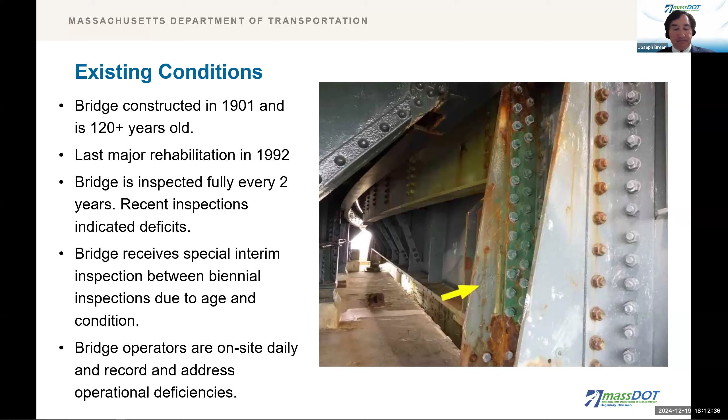The goals of the project are to reconstruct the bridge to ensure a 75-year design life or greater. We want to minimize disruptions to bridge users during construction. We want to eliminate functional deficiencies such as a long opening time, which causes delays for vehicular, pedestrian, and bicycle traffic. The minimal underbridge clearance requires the bridge to open for most vessels. The narrow channel and the center pier location prevent larger vessels from entering the upper harbor, and the center pier increases the potential for vessel impacts. We also want to improve the bicycle and pedestrian accommodation on the bridge to allow for future corridor reconstruction.

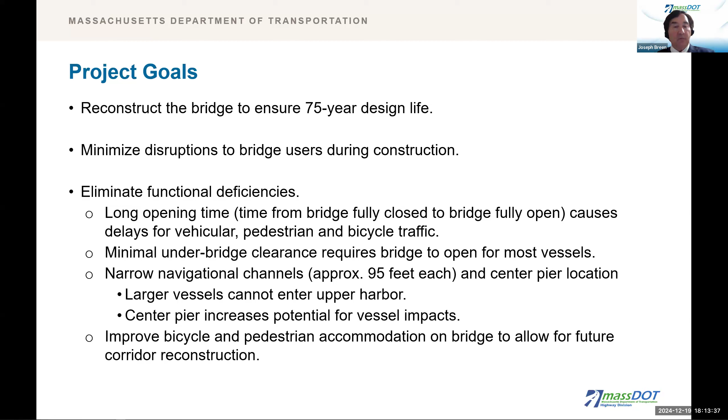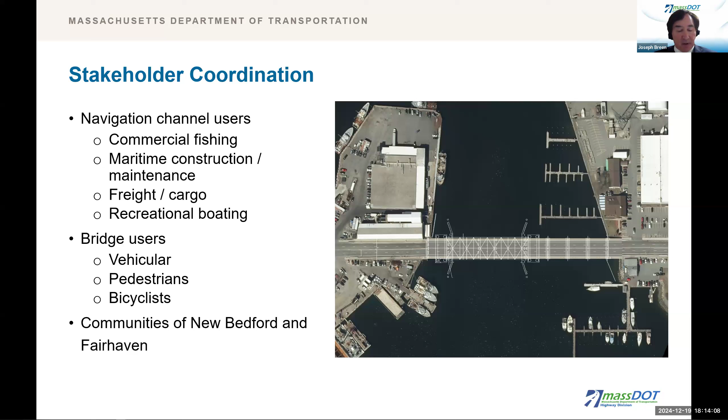Stakeholder coordination has been conducted with the navigation channel users, consisting of commercial fishing, maritime construction and maintenance, freight and cargo, and recreational boating, as well as the bridge users consisting of vehicular, pedestrians, and bicyclists, as well as the communities of New Bedford and Fairhaven. We've also continued stakeholder coordination with environmental and historic preservation agencies, emergency services and local government, the United States Coast Guard, and U.S. Army Corps of Engineers, Federal Highway, and lastly, Mass DOT.

The following map shows the project limits inside the red rectangle at the bottom of the map. On the left side of the map, we have New Bedford, and on the right-hand side, Fairhaven, with Route 195 at the top, Route 18 on the left-hand side, and Route 6 between the communities of New Bedford and Fairhaven, with Fish Island on the left and Pope's Island on the right.

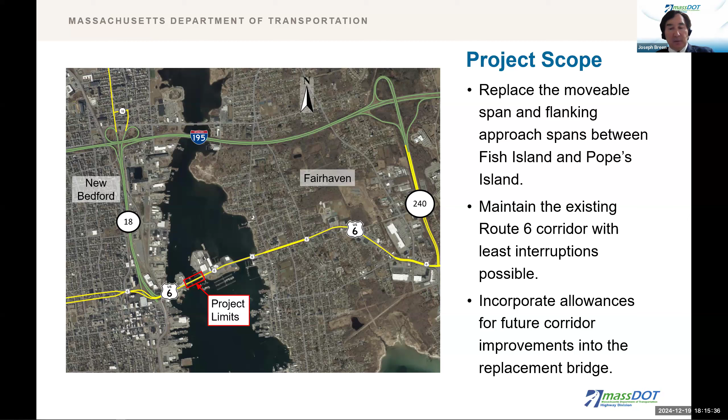And the project scope is to replace the movable span and flanking approach spans between Fish and Pope's Island. We want to maintain the existing Route 6 corridor with as few interruptions as possible and incorporate allowances for future corridor improvements into the replacement bridge. The next slide shows the project limits up closer between Fish and Pope's Island in the red rectangle.

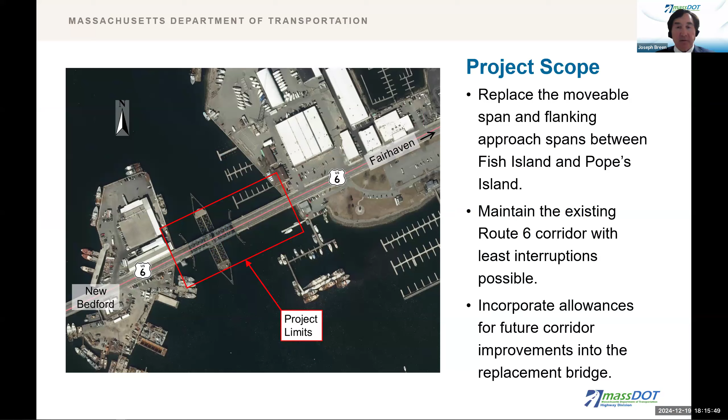So what is the selected alternative? The selected bridge type is a vertical lift span, which will allow a navigational channel width of 260 feet, a navigational vertical opening of 138 feet with 135 feet plus a 3-foot additional height for predicted sea level rise. The navigational vertical opening in the closed position will be 6 feet from the mean high water mark. And the proposed intermediate vertical opening will be 80 feet.

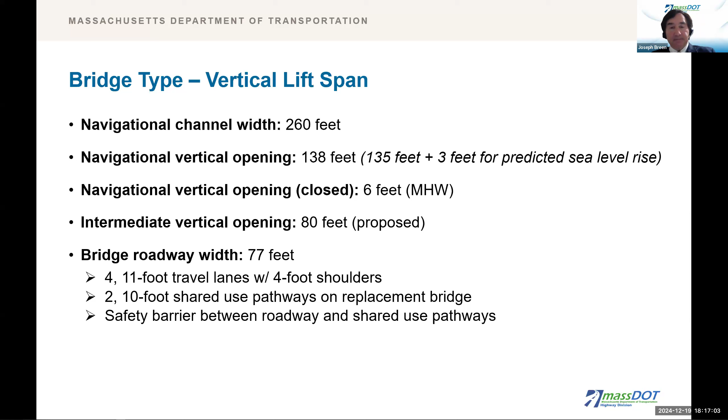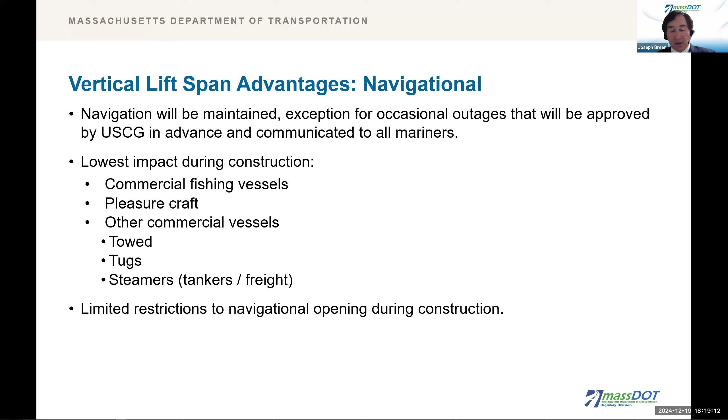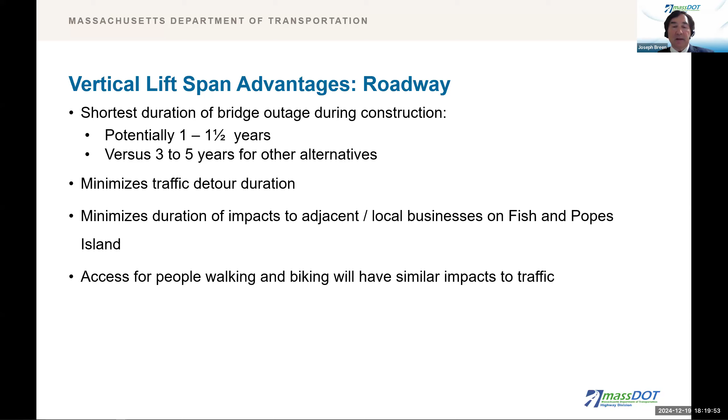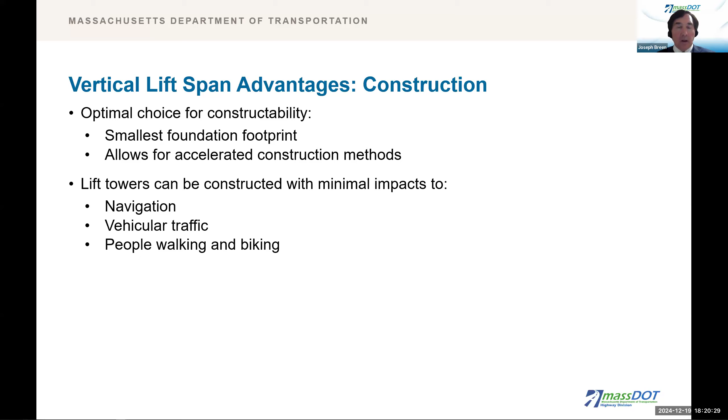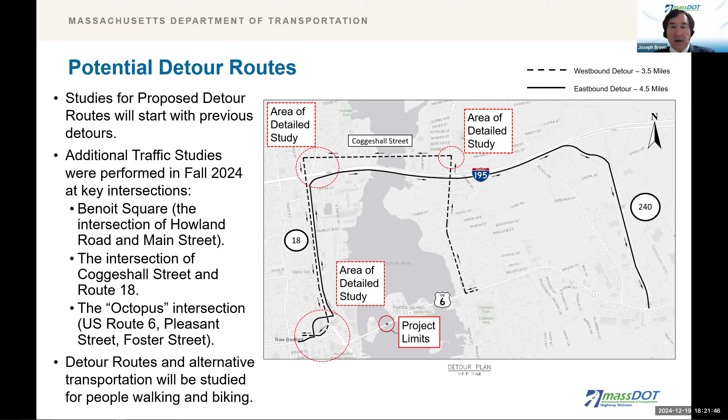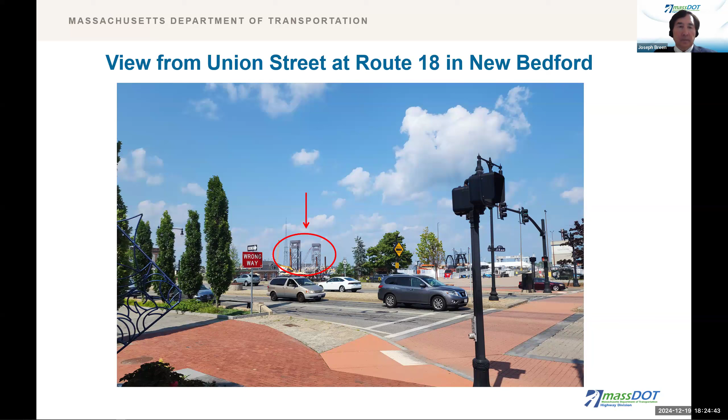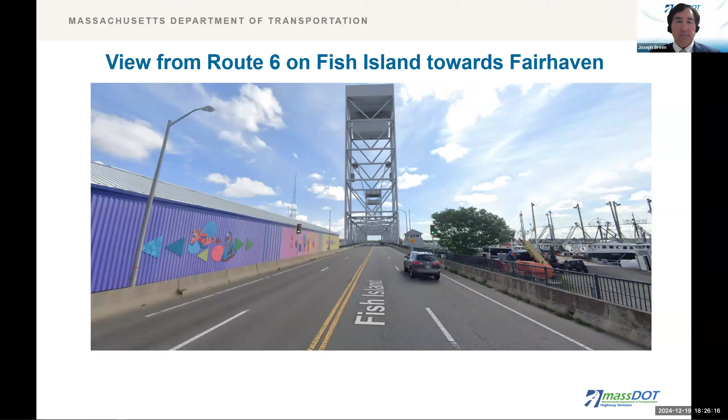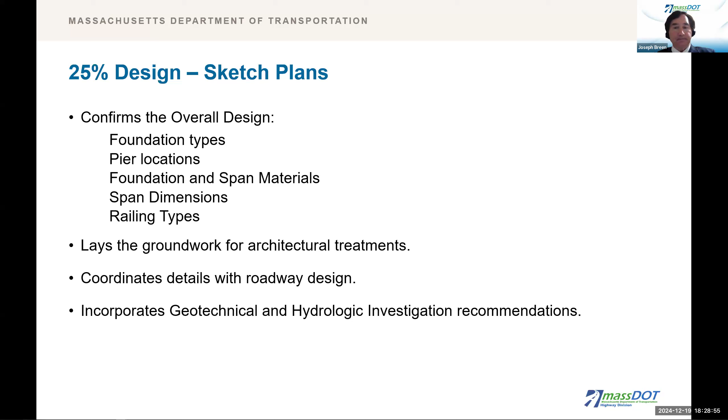The 25% design sketch plans. So what are sketch plans? They confirm the overall design for the foundation types, pier locations, foundation and span materials, span dimensions, and railing types. They lay the groundwork for architectural treatments, they coordinate details with the roadway design, and they incorporate geotechnical and hydrologic investigation recommendations. The team will also be in continued engagement with the United States Coast Guard Coordination, Mariner Outreach, New Bedford Port Authority, the City of New Bedford and Town of Fairhaven, and state representatives.

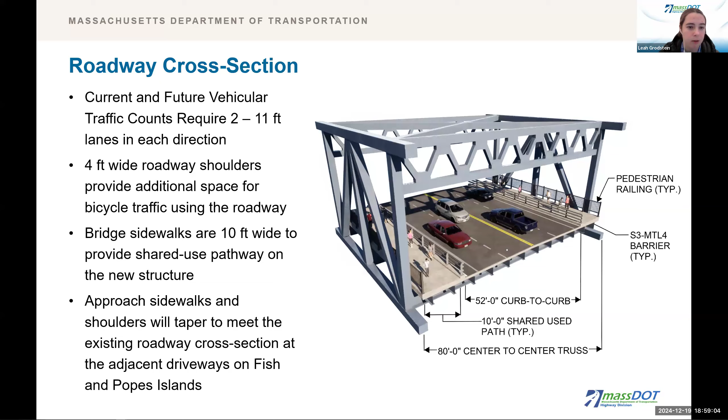Thank you. I'm going to request that we go back to our contact us slide, just so people can check out those earlier presentations if they want. I'm going to turn the floor over to Addie to take some raised hands. Thank you, Leah. We have a raised hand. John York, you can now unmute your mic and ask your question.

Yes, thank you. So I have a question about the travel lanes, shoulder, and path, and how they relate to each other. Specifically, a couple of things. The shoulder's 4 feet, and if you're really picturing bicycles using that regularly so that the paths would be primarily for pedestrians, I think you would want that a little bit wider. On the other hand, if you're viewing the paths as being true shared use paths right from the get-go, then the paths might also be a little bit wider than 10 feet. It also depends upon if you're picturing two-way travel on both paths.

I don't know if you have room, but even if you just added a foot to each shoulder, that would add 2 feet to the total width of the cross section. And even though that seems like a tiny amount, I know when you're dealing with building structures, sometimes there are break points. If you're really looking at bicyclists using the shoulder, I think 5 feet would be better than 4. And if you're looking at two-way pedestrian and bicycle use on each side, you should go to 12 feet instead of 10 feet.

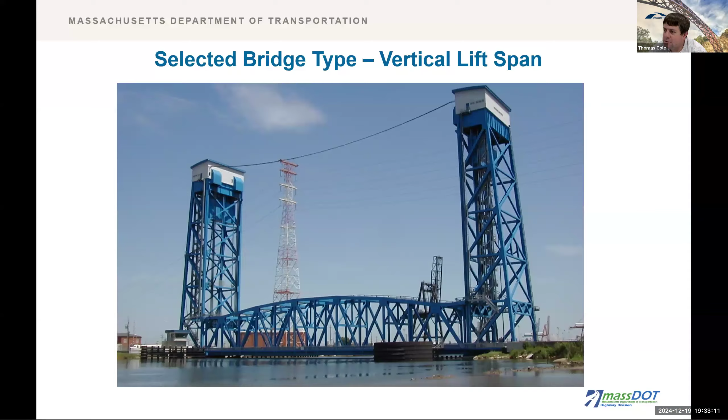So once our project is done, in the future, if some other project did want to expand bike or pedestrian and shared use pathways, they could, but that's not the scope of this project. So it's something in the future that may or may never happen.

Yeah, Joe, I'll add, since I've been in contact with the Complete Streets engineer for MassDOT too for different things, is that he often says we don't want to preclude any future work. So if there was ever a plan for the whole corridor, we wouldn't want the bridge to be a choke point and have us already have worked on the bridge and not be ready to go back to it for some time. So I hope that helps.

And then one more question before we go back to the raised hands from Jeff. Jeff says there's a state law dictating 4-foot space between cyclists and passing traffic. How does a 4-foot bike lane satisfy this requirement? And then Jeff also asked about the experience of riding a bike next to fast moving traffic, if any of us have experience with it. So thank you, Jeff. Tom, do you want to answer that question, please?

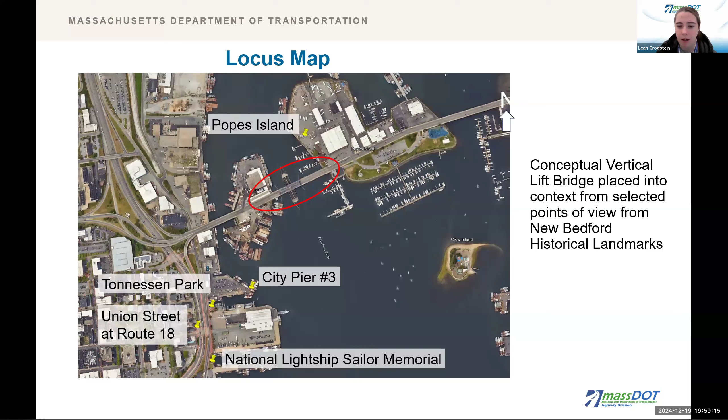Thank you, Leah. I want to thank you all for attending this meeting and asking a lot of great questions. It's a complicated project. Myself and the MassDOT team, as well as my design engineer, Tom Cole, we're very engaged. We spend a lot of time on this project. We give it a lot of thought. We care about it a lot, and we want to try to have the best bridge possible for the community.